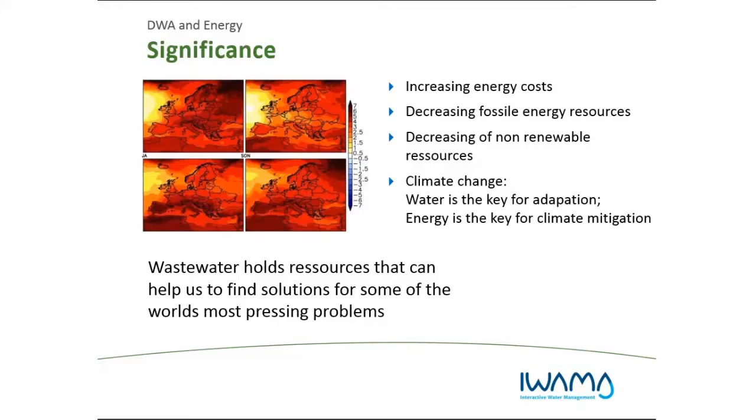And maybe this slide is for documentation and for the file, you can find it afterwards. I would like to say something about the German water sector. Maybe you already know it, as it's a very big aim to save energy, to increase energy efficiency, and to develop renewable resources. So some numbers or some figures.

Germany has 10,000 municipal wastewater treatment plants. It's very easy to remember, I always do. And more than 97% of the wastewater is treated. And maybe it's interesting for you to know the last number. Only 14 plants represent more than 83% of the total design capacity for municipal wastewater. The other numbers, you can look them up when you're interested.

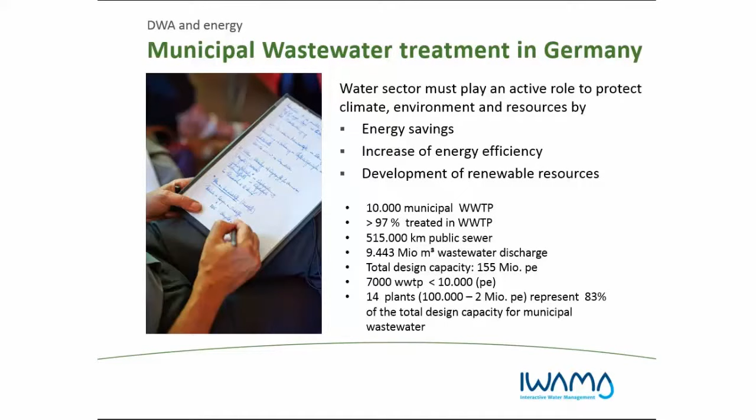So, and numbers about the wastewater treatment: electricity, 6.6 terawatt hours. This is for wastewater treatment and drinking water. Wastewater treatment alone is 4.2 terawatt hours. And the heat that wastewater treatment plants use is similar to electricity, but you know it better with seasonal variations.

So the energy we use in Germany for drinking water and wastewater, the electricity consumption is as much as you need for a city with 1.6 million four-person households. So we think you can do a lot. And the future maybe will be self-sufficient wastewater treatment plants.

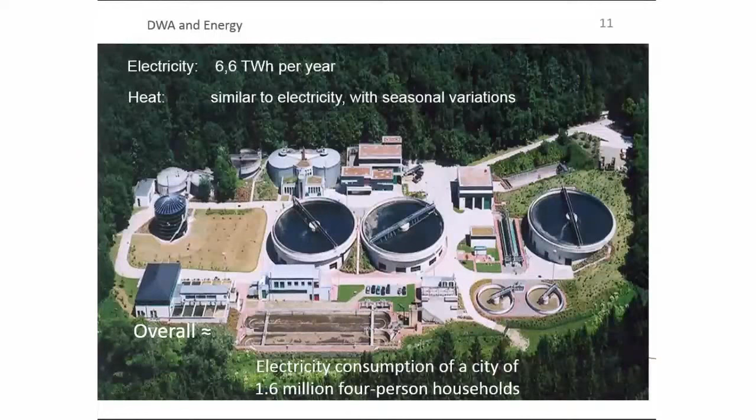So DWA has carried out a research project. We carried it out about 3 years ago, and we found out that the potentials for energy optimization have not fully been realized yet. So the wastewater treatment plants in Germany produce 1.4 terawatt hours per year, and we think, or DWA thinks, that it's only 1/3 of the possible potential. So wastewater treatment plants could triple the electricity production. And that's the reason we do a lot in this field.

Secondly, DWA is the standard for energy audit. And DWA has recently, 4 years ago, published a standard. It's called Energy Check and Energy Analysis. And it's still only available in German, but it's in the translation process, I can tell you. And I have read on the internet that you carry out lots of energy audits, and you have a special focus on energy audits. And maybe you do it in a similar way.

The average energy use, I think it's similar all over the world. You use a lot of energy for biological treatment, and you use a very big part for pumping stations, sewerage discharge structures, and lifting stations. It's usually there. The energy check and energy analysis. In this technical rule, I've brought it. When you want to look it up, I have it with my information.

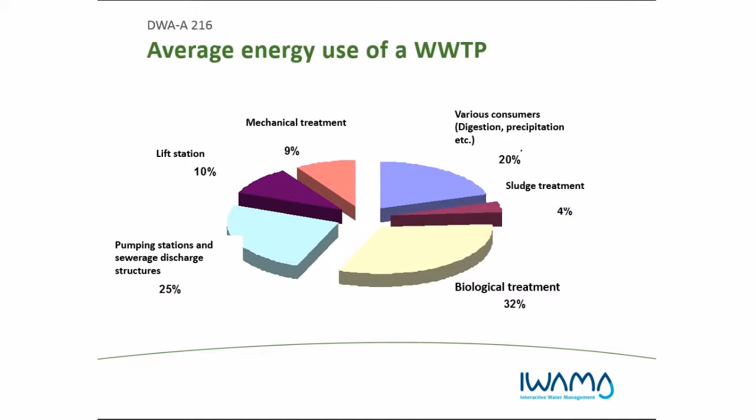It's a two-step approach. In the first step, it's an energy check. They have called it energy check. And the second step is energy analysis. The first step, energy check, I think you have done it too. Maybe you don't need the rule, but the rule was made maybe to have a similar approach for everyone. So energy check is the first step. It's just a rough estimation of the energy consumption.

And they want to find important performance indicators. They want to evaluate the performance indicators over a certain time span, and they want to find gaps and failures. And of course, they want to formulate what is the need for the next step or for the action.

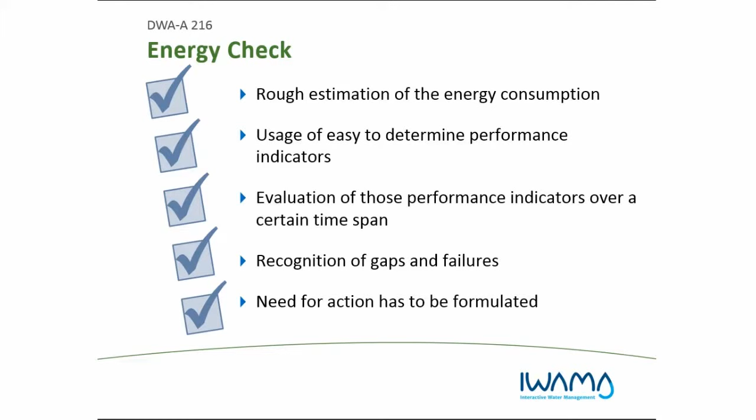So I have written down some performance indicators for an energy check, and I think you use them, and you already know them. The specific total power consumption, specific power consumption for the aeration, specific production of digester gas, the degree of digester gas conversion into electricity, self-supply with electricity, specific external thermal requisitions,

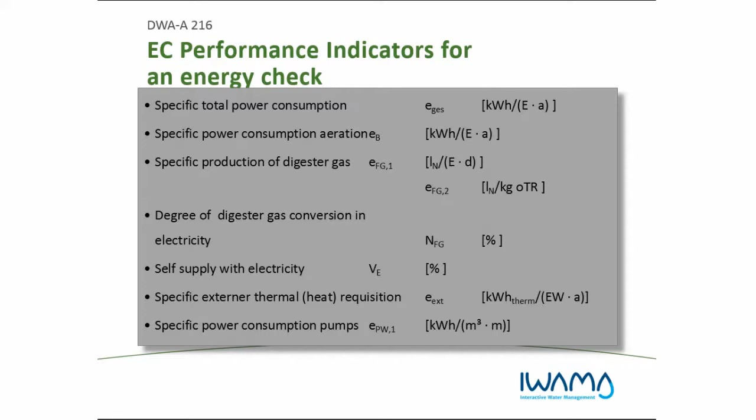and the specific power consumption of the pumps. All these parameters are explained in the standard, and the standard will help users who are not very used to energy thinking in the wastewater treatment process. And then I think it's the same as you do in your energy audits, the energy check performance indicator.

This needs per population equivalent. And so I think you have average numbers as well, and they range between, you see, 50 and 32 kilowatt hours per population equivalent and year. You say it's not translated yet.

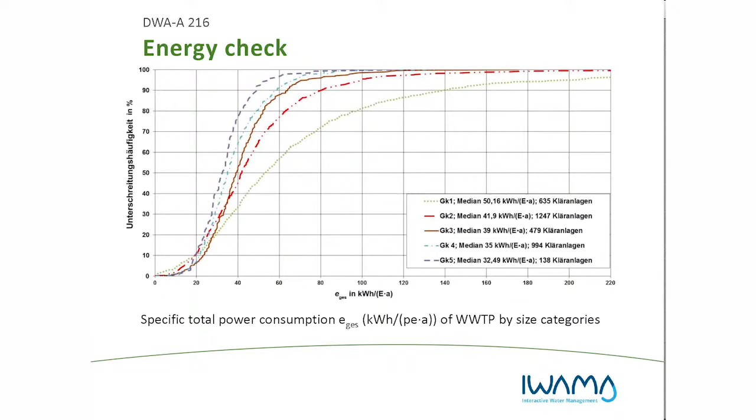I forgot. So when you have carried out step 1, you can come to step 2. It's energy analysis. In this analysis, you want to improve your energy efficiency, and compared to the energy check, you go more into detail here. The energy analysis in this standard considers the construction works, the process as such, and the techniques in place and the equipment.

And later on, you will hear a talk about aeration systems, and this is something really important for energy analysis. You really check every single step. Oh, I've lost my pointer. I will finish here. The evaluation process.

Like all management processes, it's a continuous improvement process. It's like plan, do, check, act. I think you know it very well, and they are ongoing processes, and you always need the evaluation. And then you need criteria for the definition of success.

At the moment, the most important criteria are always economic calculations, but maybe it will change someday. So I've written a multi-criterial assessment. Maybe there are other important criteria in the future. When you have got questions about this standard and the energy check and energy analysis, you are always invited to ask.

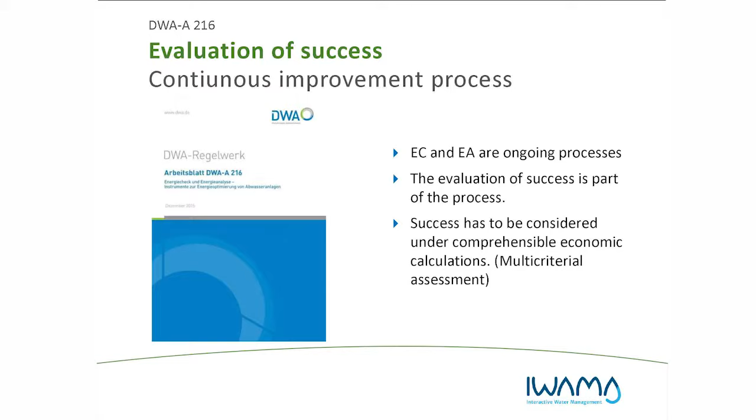And now let's start with part 3. It's a research project called Energy Efficient Water Management, and it was funded by the German Ministry of Education and Research. Before I tell you something about this project, I would like to inform you about 3 other projects concerning the topic of water and energy.

The first one, UIP, is a German project. It's called Environmental Innovation Program. It was carried out between 2013 and ended last year. They had 10 projects, and I've written them all down for you in order to inform you what they were researching. When you are interested in one or the other, you can always look them up on the internet or you can ask me.

As you can find out, they had energetic optimization, plus energy wastewater treatment plant, energy generation, energy self-sufficient wastewater treatment plant. So there are lots of wastewater treatment plants in Germany who work in this field. Another project, maybe you are interconnected with them, is the project Power Step. It's a Horizon 2020 project, and it's an energy positive wastewater treatment plant.

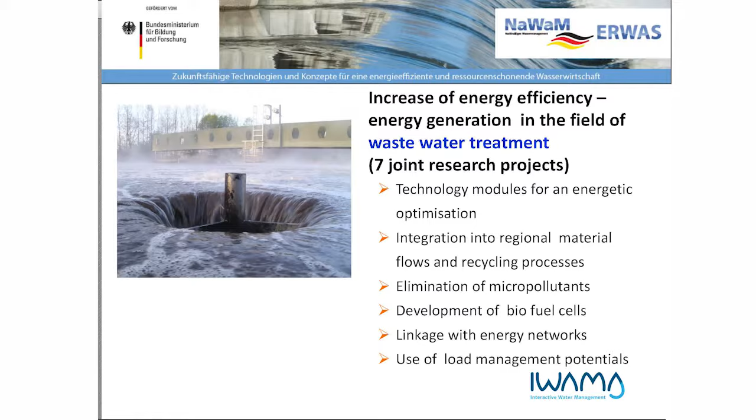Then there were 5 joint research projects in the water supply system. They had energy recovery. They worked a lot with modeling and simulation, and they were looking for the linkage between energy networks and drinking water, and they wanted to use load management as well.

Here are the 12 projects. We have a nice abbreviation, not as nice as IWAMA, but similar, from arrivee to KRN-Mephrec. I don't want to tell them all. The bold written ones are the wastewater projects. So we had treatment plants

as control components in energy grids, microorganisms produce energy, methanol synthesized from wastewater. Then the future wastewater treatment plant was developed, a wastewater treatment plant as energy service provider, a wastewater treatment plant as energy buffer for power grids, and transforming sewage sludge, one of your main projects as well, to energy and phosphoric fertilizer.

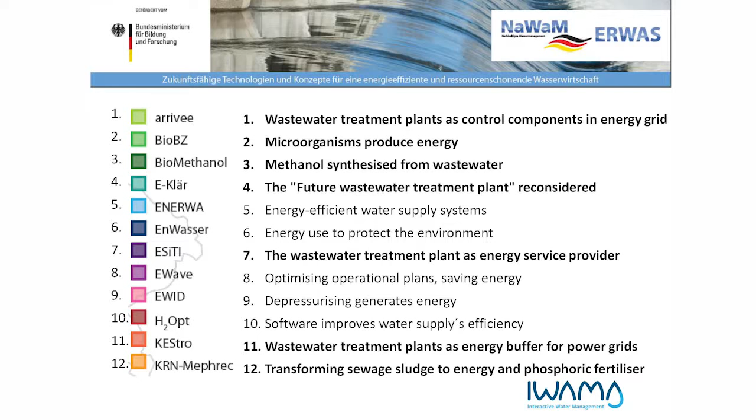And now the results. It's very easy. First they found out water treatment and energy must be connected, as you know already. But the real revolution is that microbial fuel cells work very well and can provide potentials. I will tell you later on. Then they found out that water management facilities provide flexibility components for the electricity market. And maybe you have found it as well.

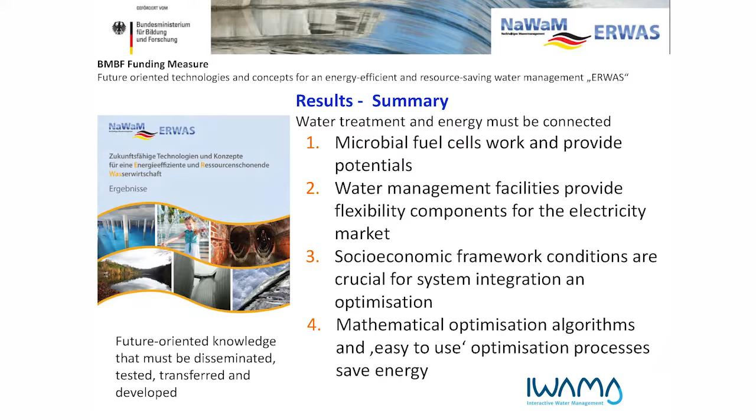They found out that the socio-economic framework conditions are crucial for system integration and optimization. And mathematical optimization algorithms and easy-to-use optimization processes save energy. These are the results, very in short. And if you have some more concentration, I could inform you about some results in more detail. For example, one project, arrivee, wastewater treatment plants as control components in the energy grid.

When I show you the next slide, you will see lots of sentences. Usually I don't do it in slides, but I did it for your documentation, not for the presentation. When you read it on the internet, you have more information. But I want to say that arrivee found out that wastewater treatment plants in Germany are capable to provide the needed technical requirements and potentials to interact with the energy sector. And that is really a good result, as in the beginning everyone said, no, it's never possible. Wastewater treatment plants can never interact with the energy sector.

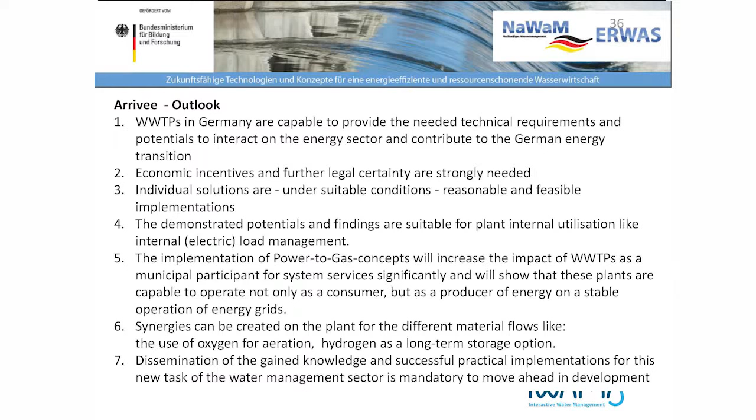The second is E-Klär, the wastewater treatment plant of the future. They had a kind of management project, and the aim was to find the really good wastewater treatment scheme for an optimal use of energy and resources, and they wanted to adapt it to the future. So when the future changes, wastewater treatment processes must change as well. And so they had a decision support system to choose the infrastructure. It's really interesting. You can look it up on the internet as well.

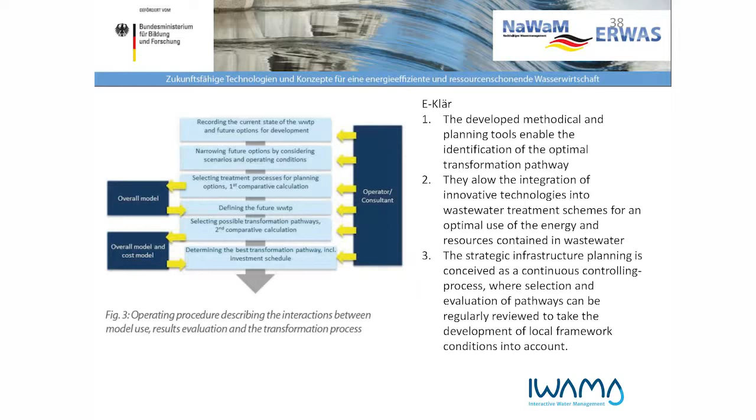Another interesting project, carried out in Darmstadt, where the next speaker will come from, is the wastewater treatment plant as energy service provider. What's very important to say is that the former approach of improving the efficiency of individual units by energetic optimization is not sufficient anymore and has to be supplemented by a holistic approach on flexibilization potentials. You can read it later.

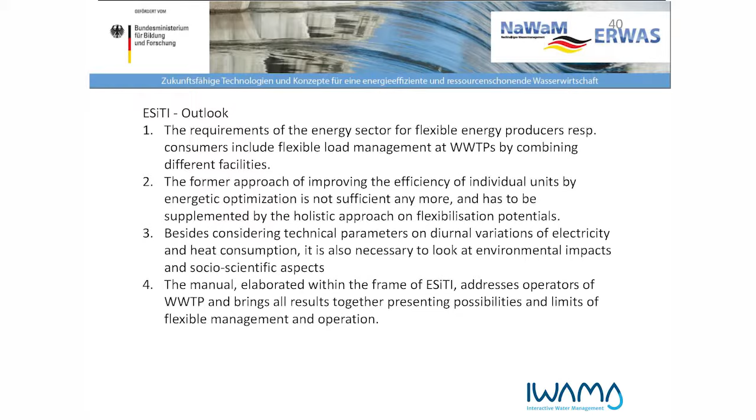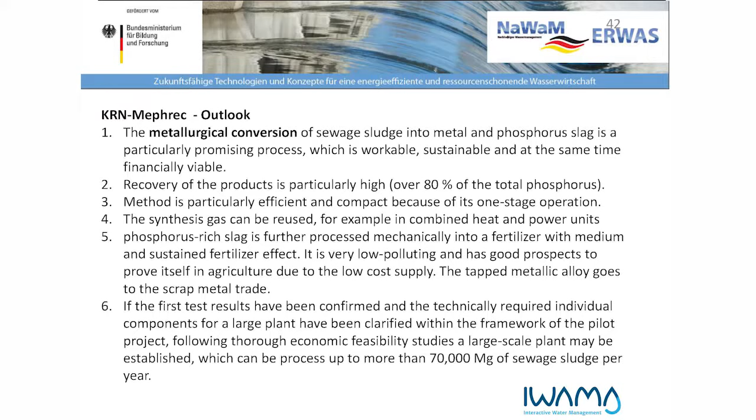And maybe KRN-Mephrec is interesting for you as well, as they tried to transform the sewage sludge into phosphoric fertilizer with a metallurgical conversion process, and it's still a small plant. It's a plant that doesn't function at the moment, but the first research they carried out shows that it's possible to regain the phosphoric slag. You can read this later.

And then they had very interesting results in cross-cutting issues. They had working groups in biofuel cells, energy storage, sewage sludge, and modeling and simulation. I would like to repeat some just for the ending. For you, maybe you can integrate it into your project: bacteria can clean wastewater and simultaneously produce energy. I think that is one of the most revolutionary aims that they found out, and it's really possible.

Another is that water management facilities provide flexibility components and can take part in the electricity market. Energetic optimization of piping systems and drinking water supply can save energy.